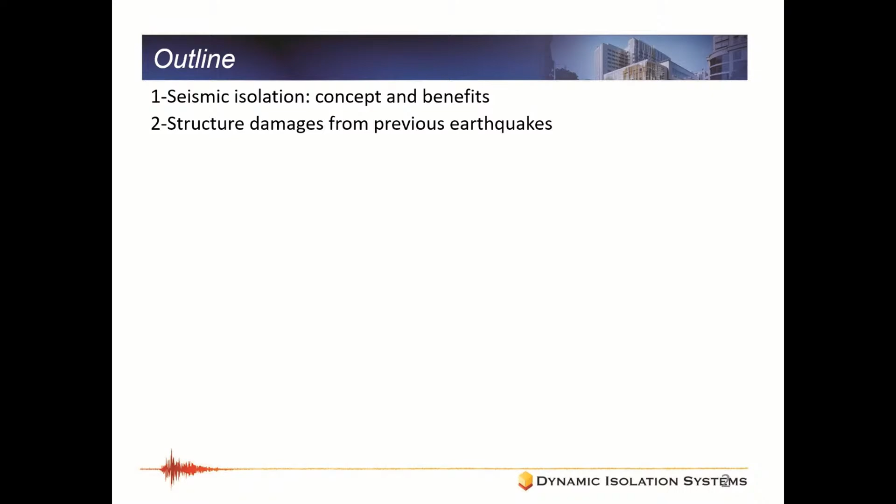I will begin with the outline of the presentation. I will start with seismic isolation in general: what's the concept and what are the benefits of using seismic isolation? Then I will show some structural damages from previous earthquakes. When you design a building or a bridge conventionally without using a protective system, what's the damage that you will be expecting? I will show some pictures and photos from actual earthquakes.

The third point will be the main topic of my presentation. I will be talking about the main product used for seismic isolation, named lead rubber bearings, or LRBs. I'll be talking about the components of the lead rubber bearings, testing, and the benefits and advantages of the bearings. I will also show a case study for cost saving—how you can save money when using lead rubber bearings when designing a bridge.

Then I will show different projects and different applications from different countries around the world, from Chile, Peru, the US, Japan—different buildings, bridges, all kinds of applications. I'll also show that it's good for either new constructions or retrofits. After this, I will show some actual examples of isolated structures around the world that passed through major earthquakes and had no damage. Then I will end this point showing some research projects—we also work with universities and have lots of research projects with them using lead rubber bearings as well.

After I finish this part, I will show another product, also for seismic isolation, but a little bit different. We call it low mass isolation or equipment isolation. In summary, sometimes we want to protect very expensive equipment, such as an expensive computer or a piece of art. Sometimes the building itself is not isolated, but we need to isolate something small, so we have invented a product that can protect equipment.

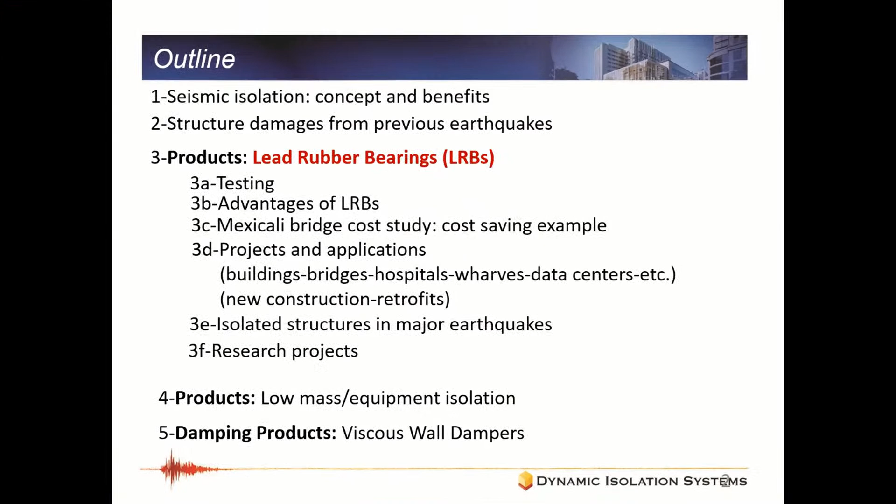So I'll begin with the first topic, which is the concept and benefits of seismic isolation. I will begin with a short video to show the difference between two buildings: one of them is fixed, and the other uses seismic base isolation at the base. This is a shake table testing, showing the differences between the two buildings.

As you can see, when I shake the two buildings, the first one, which is fixed, you can see all the forces and deformations from the earthquake are transferred to the building itself. You can see that it's moving very strongly. But when you look at this building, which is seismically isolated, you can see that all the deformation goes to the bearings themselves, and the building feels almost no forces or deformations.

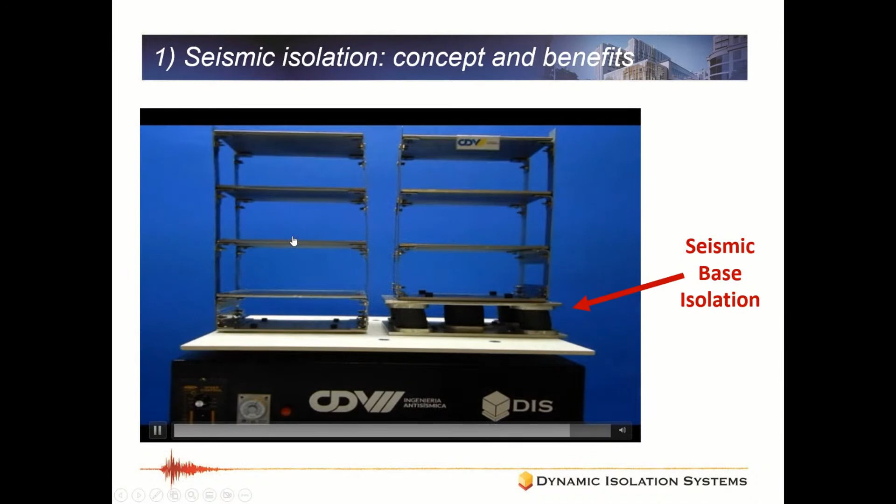So this is the main concept of seismic isolation: to decouple the building from the ground, to decouple the building from the earthquake. All the deformation will go to the product that you are using, and the building will not feel anything. If it's fixed to the ground, all the forces and all the deformations will go up to the building and will cause damage. To translate this into some technical knowledge, this is the typical response spectrum that we get from an earthquake.

Acceleration versus period in seconds. Let's assume that this is the period of a non-isolated structure, around 1 second. What does this mean? It means that a non-isolated structure will move in an earthquake one full cycle in 1 second, so it's moving very quickly. So the period of the non-isolated structure is 1 second, moving very quickly, one full cycle in 1 second.

So what's the main idea of isolation? It is to lengthen this period, to make the building move slowly. Usually for isolated structures, the period will be around, say, 3 seconds, just as an example. So the building now is moving slowly, which causes a reduction in forces in the building itself. This is the main concept: to decouple the structure from the ground and introduce a plane of lateral flexibility, something very flexible. You put it under the building and it will lengthen the period. And as soon as you lengthen the period, the forces are much less — the forces between this point and this point could be 3 to 5 times less.

And not only this — so we do period shifting, but also these products add damping to the building itself. So we decouple the structure from the ground, and we also absorb the energy of the earthquake by adding additional damping.

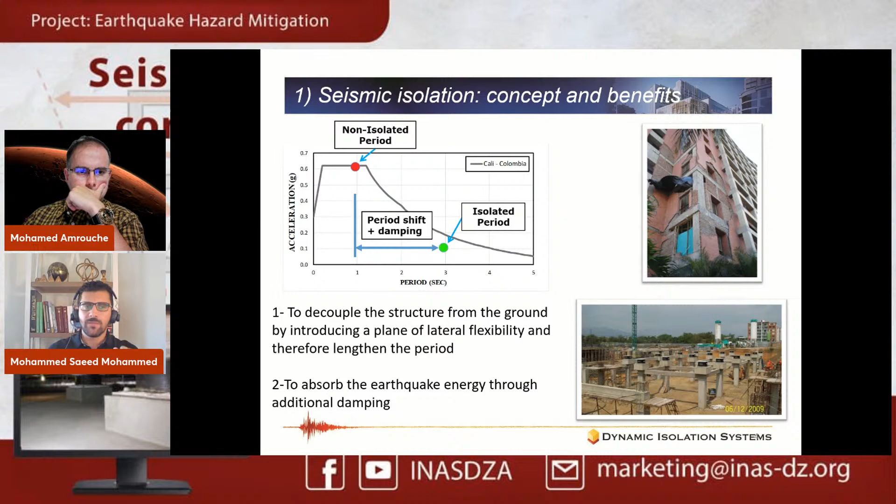So what's this photo on the top right? This is an actual photo of a hospital that was built in Colombia. The owner of this hospital was about to open the hospital and start operations in 2004. And in 2004 in Colombia, it was hit by a very strong earthquake, and as you can see, the building was damaged. The owner spent 3 years to retrofit the building in order to be operational again. Since then, he learned his lesson, and this owner decided to use seismic base isolation in all his future projects.

So as soon as he tried, he learned his lesson the hard way. He was hit by the earthquake. He stopped operations for 3 years. Then he decided to use isolation since then.

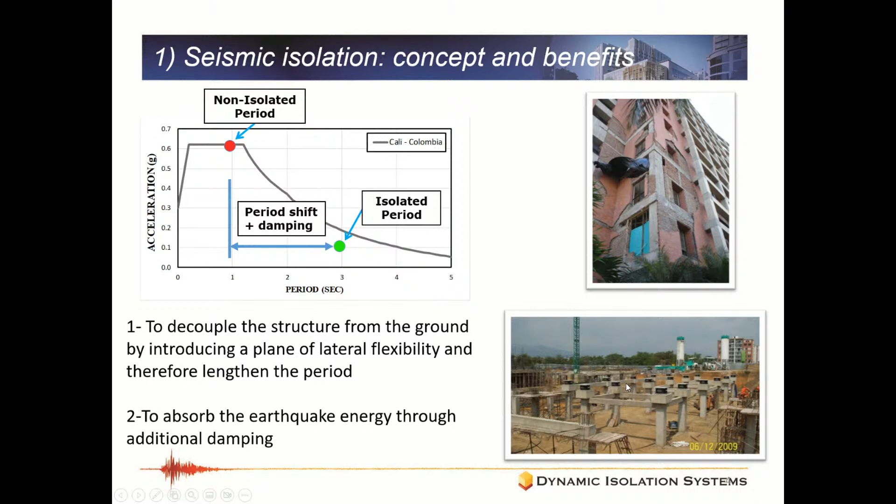Now in the next slide, I'll start showing some damages for buildings and bridges from previous earthquakes. I will begin with a very popular earthquake that happened in New Zealand in 2011, the Christchurch earthquake. I'm showing 2 photos here, of Christchurch downtown before the earthquake and after the earthquake. As you can see, after the earthquake, most of the buildings, like 70% of the buildings in the downtown, were demolished.

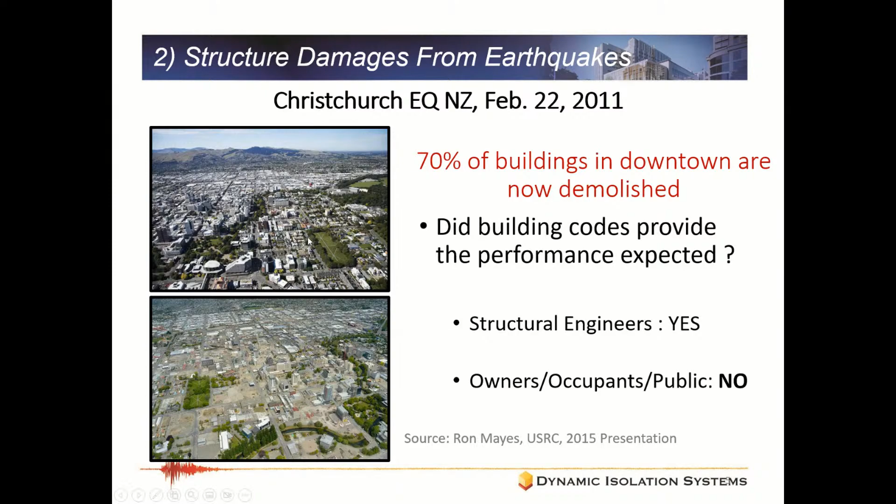Okay, is this good? Is this bad? Let's think. Per the structural engineers, this was okay because there were no collapses or minimum collapses, so they satisfied the codes. All the structural engineers were happy — minimum collapses, life safety was achieved. But the owners and the public did not know this, so they thought their buildings were earthquake proof, and they were not happy. So there was a debate back there in New Zealand: who is paying for the insurance, who is paying for all this demolition, who is paying for retrofits?

So that's why it shows that conventional designs, yes, they are good — life safety is achieved — but they are not good enough, because you will lose functionality, you will lose the continuous functionality of your building. You will need either to demolish the building and build a new one, or repair and retrofit your building, and it might take 1 to 2 years to make it back to work.

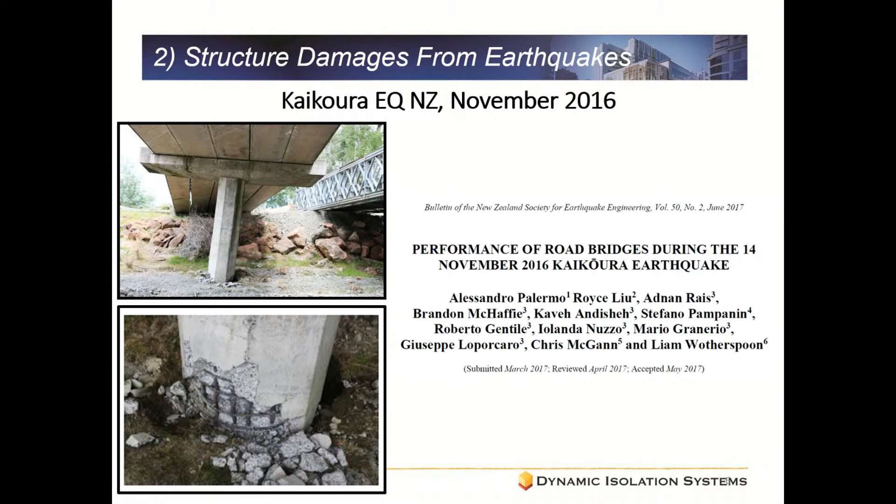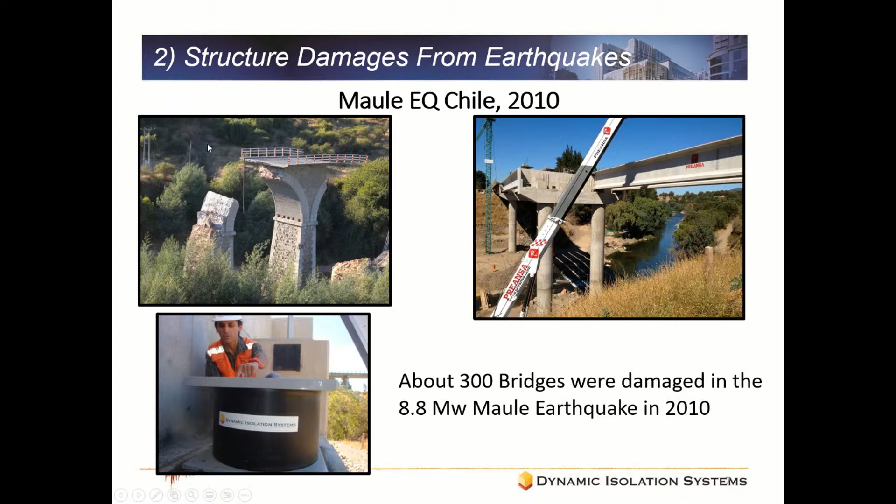Another very strong example from 2010, an earthquake in Chile. It was a magnitude 8.8 earthquake, and this earthquake caused lots of damages and collapses actually in Chile. More than 300 bridges were damaged during this earthquake.

Since 2010, seismic isolation was introduced into Chile. They started having lots of projects in Chile, lots of bridge projects, lots of hospitals and buildings. So they also learned their lesson the hard way - a big earthquake hit the country, lots of collapses, lots of damages, and then they started to use isolation.

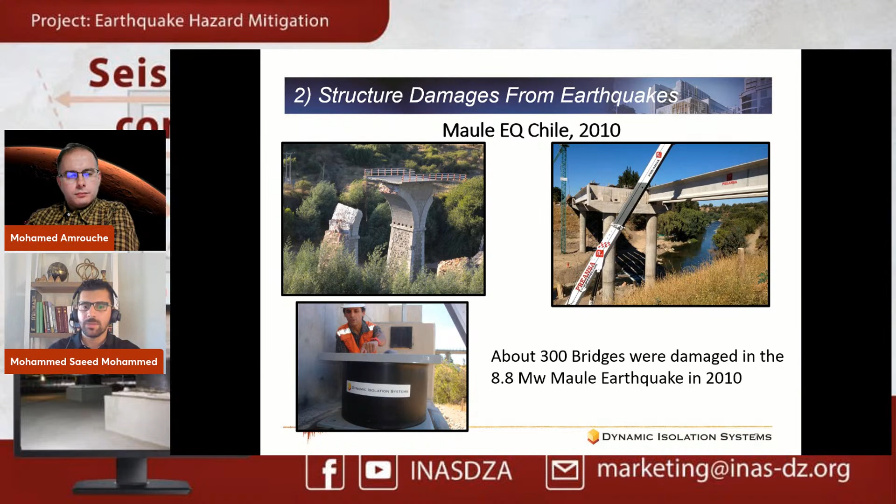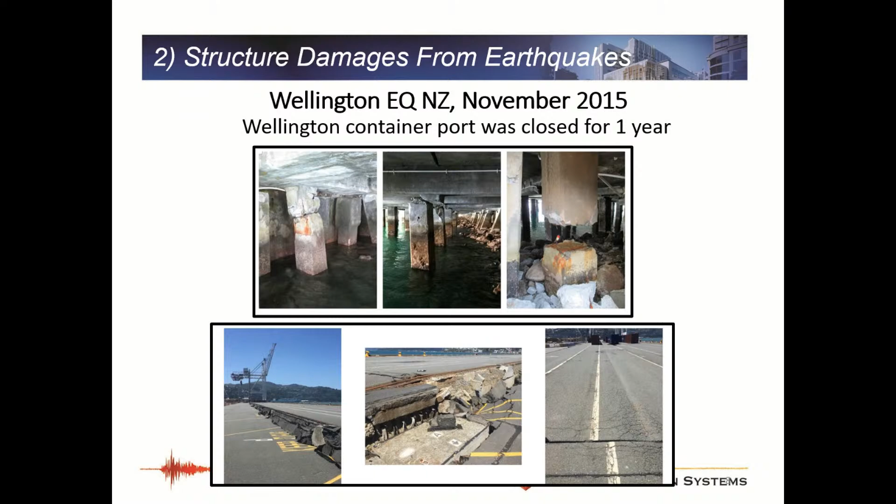All the ships and all the containers that were supposed to go to this port had to change the route and go to another port, affecting the whole economy of the country. So these are just some examples showing you that conventional designs are good, they satisfy the code, life safety is achieved. However, they are not good enough because your building or your structure will not be functional after the earthquake.

Now I will go to the third topic, which is the product itself. What do we use to protect this building? What's the seismic isolation product? The product that I will be presenting today is called lead rubber bearings, and this is the most common seismic isolation product used worldwide.

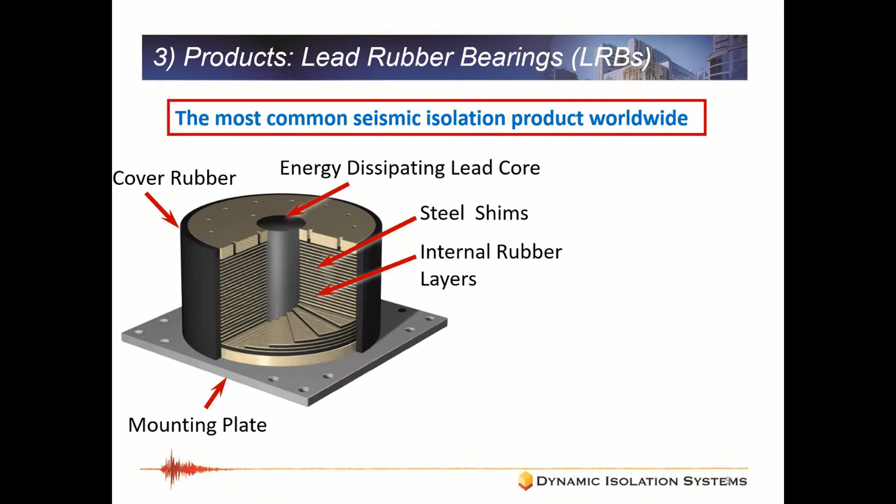If you look at the components of this bearing, you will notice that vertically there are layers of steel and layers of rubber, so vertically this bearing is very stiff, very strong. It can hold the weight of the building and the bridge. So it's very stiff vertically, but laterally, when the earthquake comes, it's very flexible so that it allows the bearing to move and absorb all the energy of the earthquake.

So vertically, it can carry loads up to 4,000 or 5,000 tons. It's very strong, but laterally it's very flexible, so that when the earthquake comes, it will decouple the building or the structure from the earthquake.

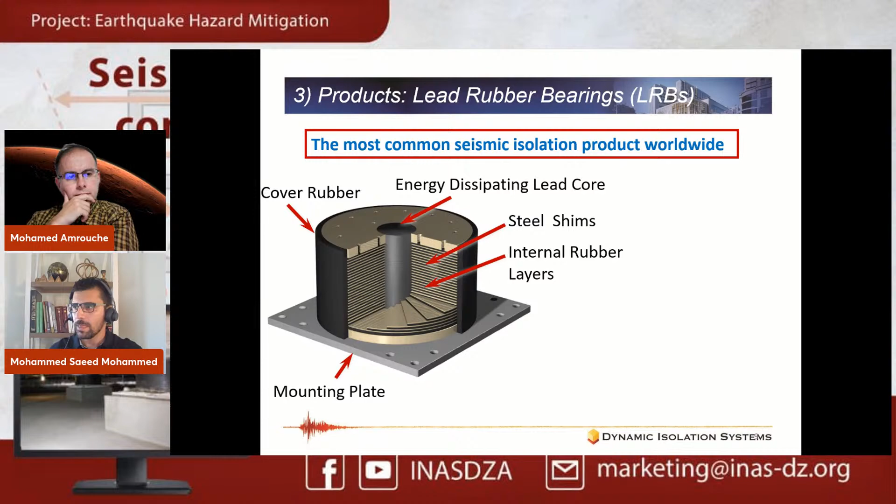In our company, we have built or manufactured lots of bearings, more than 27,000 bearings around the world. Very small bearings and very big bearings. The diameters range from 150 millimeters to more than 1.5 meters. The lead core diameters also go up to 400 millimeters for these internal lead cores. And the vertical capacity is very high, it could reach up to 4,400 tons.

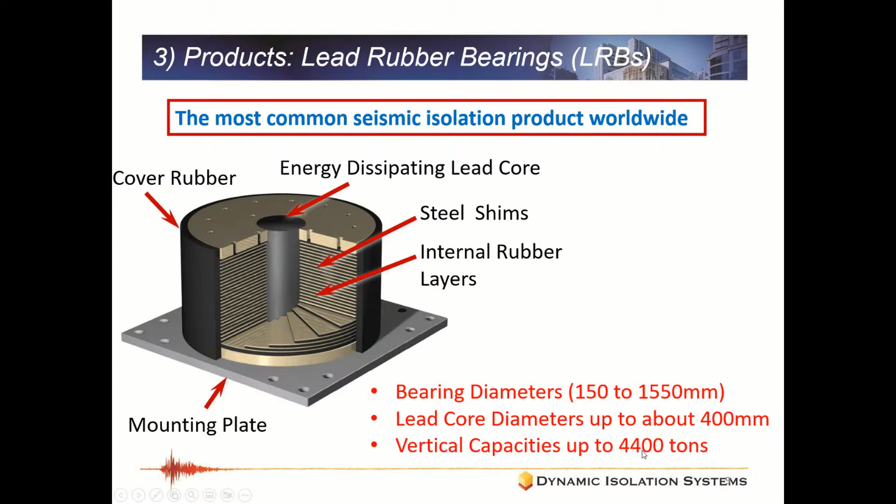One of the projects that we have finished in Turkey. The bearing is connected with anchors up and also anchors down to the concrete.

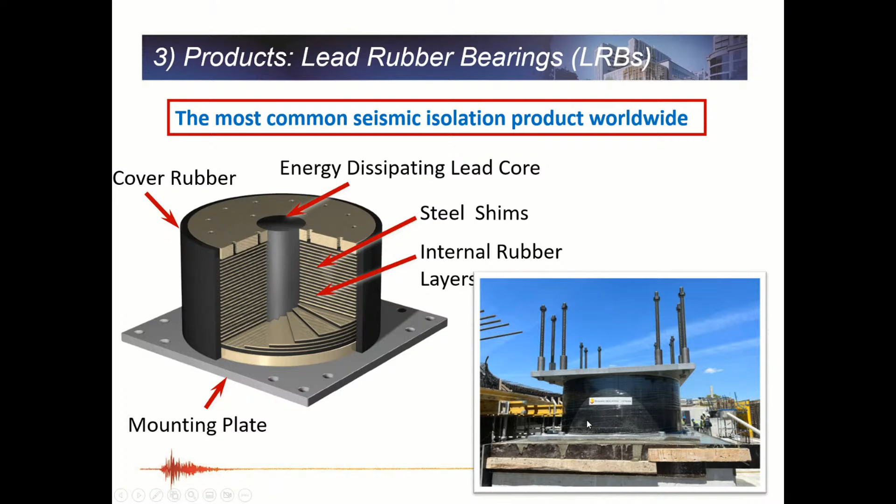So these bearings, when we design them, what about testing? How can we make sure that these bearings are good? Most of the codes around the world require testing these bearings, all of them, 100%. So if a project has 100 bearings, we test 100% of these bearings. Some of the European codes do not ask for testing, or ask for testing only 20% or 30%, and this is also acceptable in some of the codes. But usually, as part of our quality control, I always prefer to test 100% of the bearings to make sure that every single bearing is good, because this bearing is affecting the lives of people, affecting the structures. So we test 100% of these bearings.

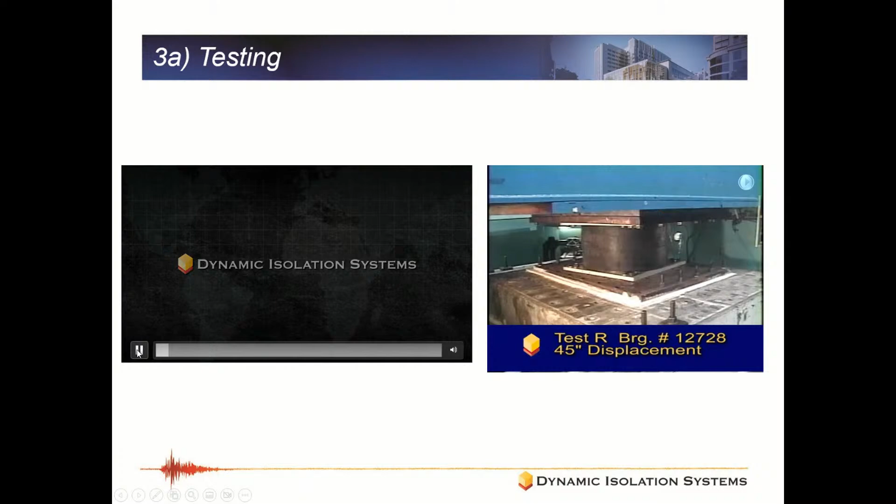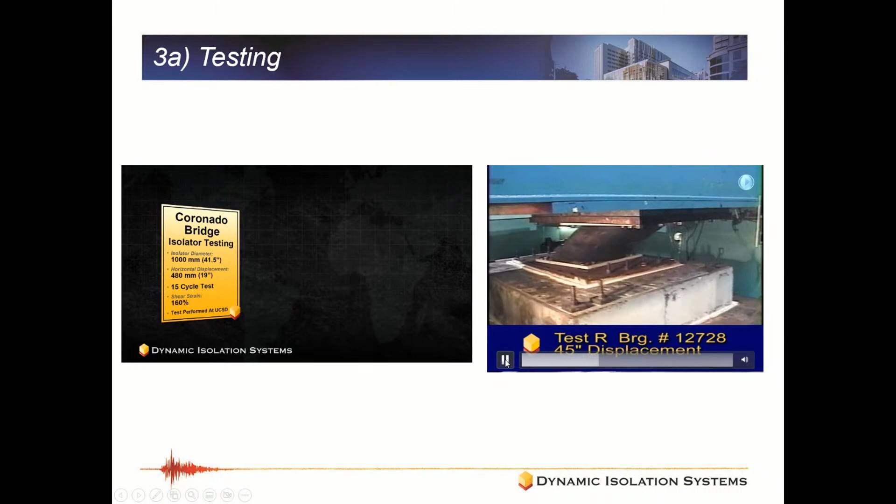Another example for another testing. This was a project in California, in the US, where the peer reviewer asked to push the bearings even more during testing to make sure that they are good. So the diameter of the bearing was 45 inches, and it was pushed to 45 inches of displacement. It was stretched very strong. And as you can see, it's very robust, it will just come back to its original position.

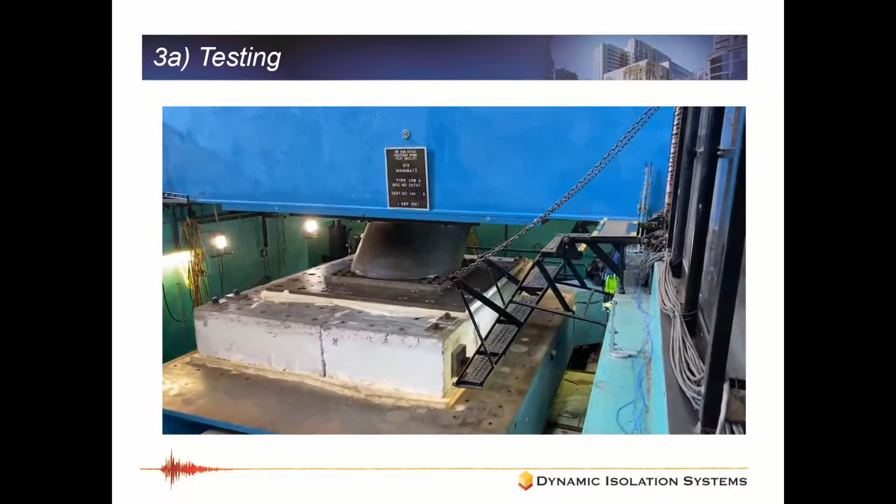Another very recent test that we finished this year for a big project in New Zealand. The bearing will be stretched about 800 millimeters. It's a huge bearing for a big bridge in New Zealand. As you can see, it's stretched very, very strongly. So when the earthquake comes, the bearings will move, the building or the bridge will not feel anything, and then the whole thing will recenter and come back to its original position. These bearings do not need to be replaced. They will just come back to their original position and will be ready for the next earthquake or for the aftershocks. You don't need to replace them after the earthquake.

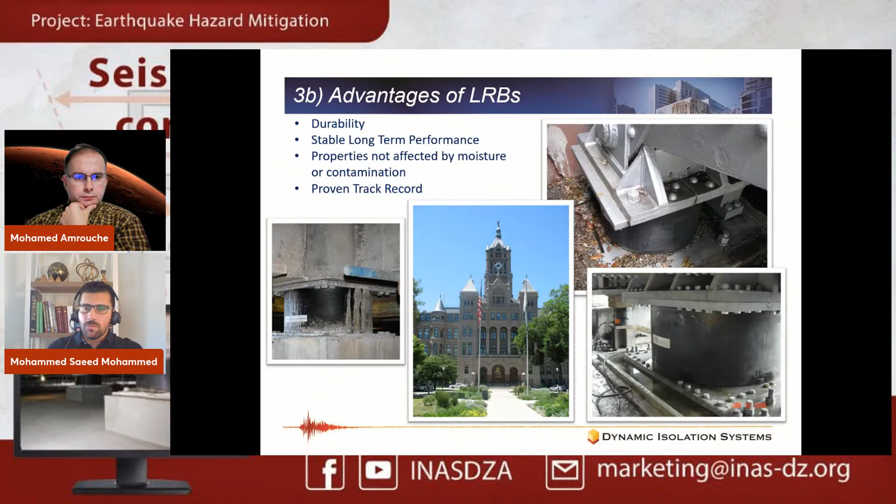So what are the advantages of using LRBs, or lead rubber bearings? There are lots of advantages. One of the main ones is the durability. You want to put these bearings under a building or a bridge and keep them there for the rest of the life of the structure, for 50 years or 70 years. So the durability of these bearings is very strong.

As you can see in these photos, some of these bearings, you can see the concrete is spilled on the bearings. You can see under a bridge there is moisture, contamination, dust. These bearings are very good and are not affected by the moisture or contamination at all. So there is a stable long-term performance. They will stay for the rest of the life of the bridge or the building, and the properties will not change. They might change very minimally, but the properties are stable for the rest of the life of the building itself.

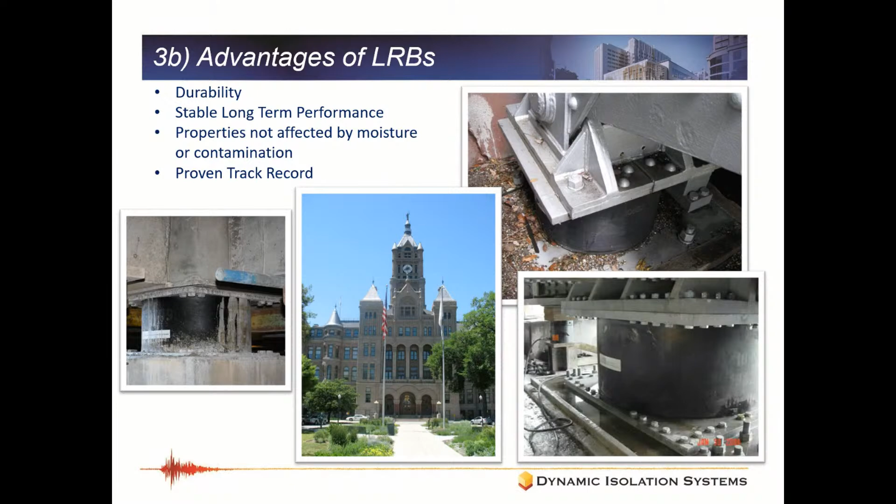Some other photos showing the durability of these bearings. This is a photo from a wharf in Tacoma that we completed about 2 or 3 years ago. As you can see, these bearings are very close to the water. They're not just close, they are actually submerged in water twice a day. So the water will go up and down, and nothing is wrong with the bearings. The properties remain the same, and the life of the bearings is the same as the structure itself.

This is also another bridge in Azerbaijan. The bearings are very close to the water, so they are in the splash zone. Because of the cover rubber that I mentioned before, all the internal components of the bearings are protected.

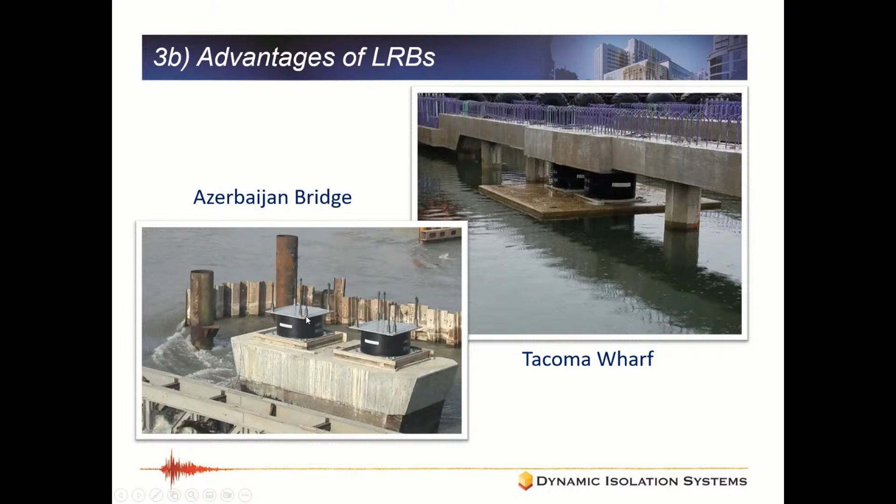Another advantage of this bearing is the cost saving, specifically when you use it for bridges. I'm showing now an actual case study for a bridge constructed in Mexico, the Mexicali bridge. This study was done by an engineering firm named Cautin for this bridge.

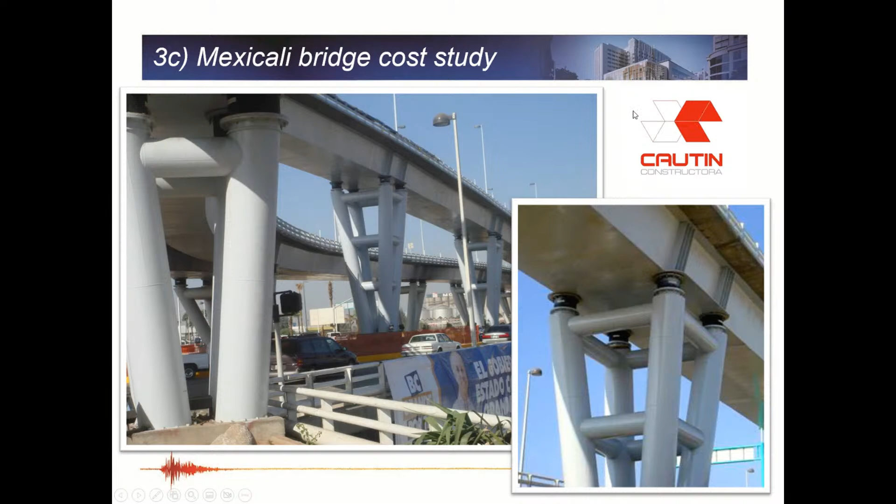What did they do? They actually designed the bridge twice: an isolated design, and then a conventional design. Then they compared the sizes and volumes of the materials that would be used. As you can see, for the conventional design, let's take an example.

For the columns, the concrete volume ratio is 1.56 compared to the isolation case, and 2.85 for the steel volume ratio. So the volume of material for the conventional design was much higher, because the lateral forces coming from the earthquake in the conventional design are much higher than in the isolated case.

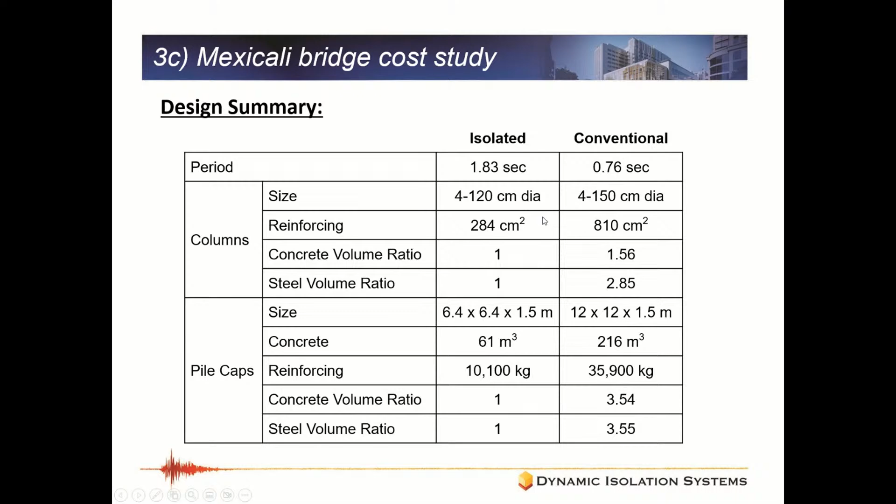And if we translate all these numbers into money, they found that even though the price of the isolators was about $1 million, the total difference in project cost between the conventional design and isolated design was about $2.8 million. So there were a lot of cost savings when they used LRBs in the bridge. This is one of the most important advantages of using LRBs specifically with bridges.

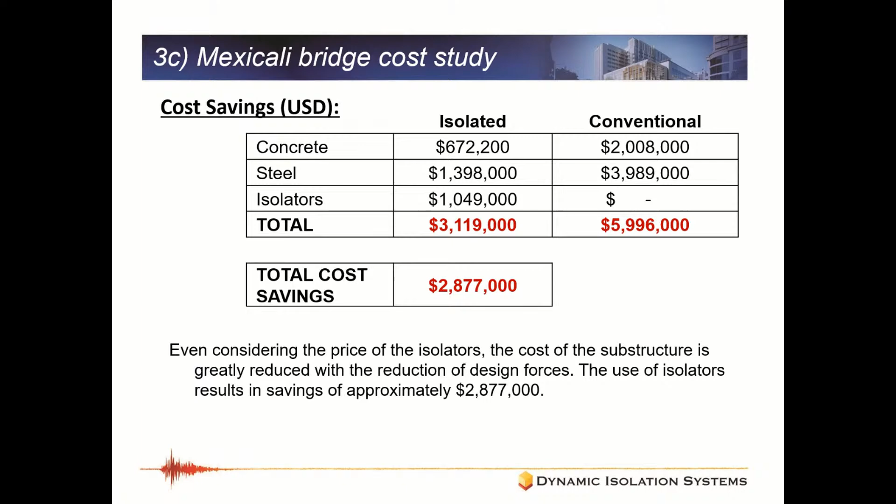After speaking a bit about the product itself and showing you the testing, now I will show you different projects and applications around the world. We have done lots of projects in more than 22 or 25 countries around the world. In all the countries that have earthquakes, you will see lead rubber bearings or seismic isolation.

So when a regular guy wants to buy an apartment, he will ask the owner, is your building isolated or not? And if the building is not isolated, he might say, no, I want an isolated building, I want to protect my savings. So the public awareness there is very high. That's why you'll find lots of residential buildings in Japan are isolated. This is not the case for many other countries.

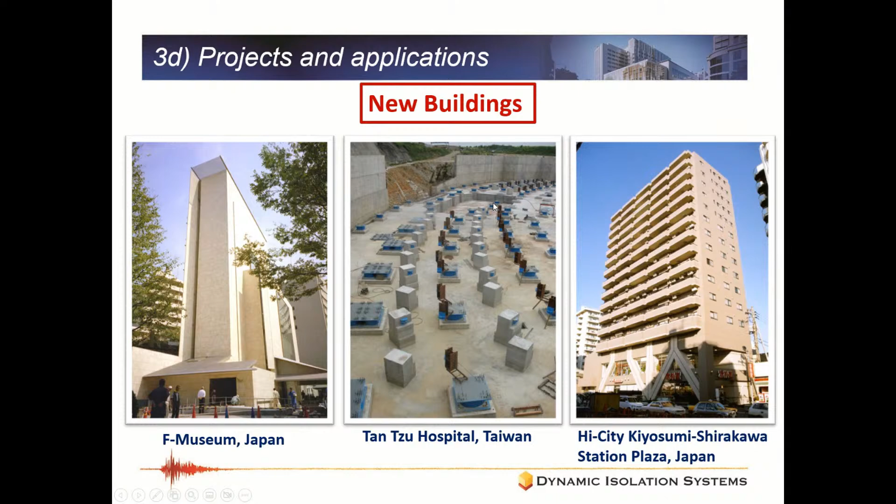More case studies and more examples, but now I will move from new buildings to bridges. Bridges are also a very good example for seismic isolation.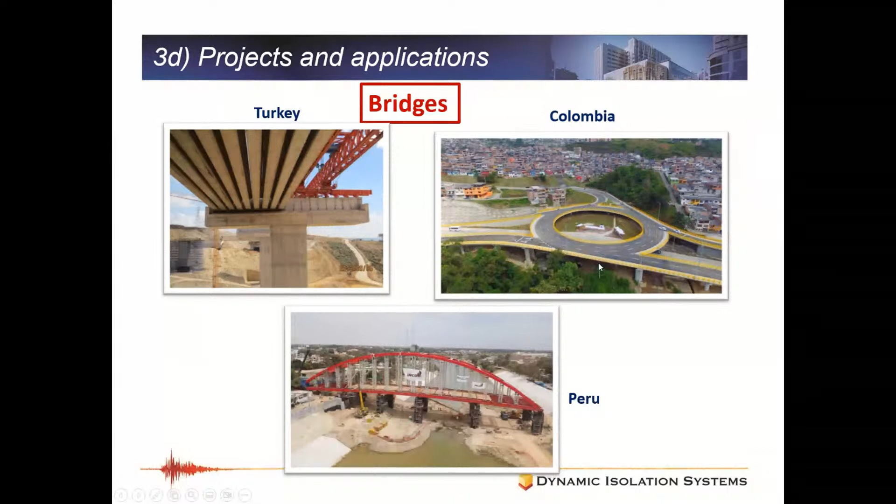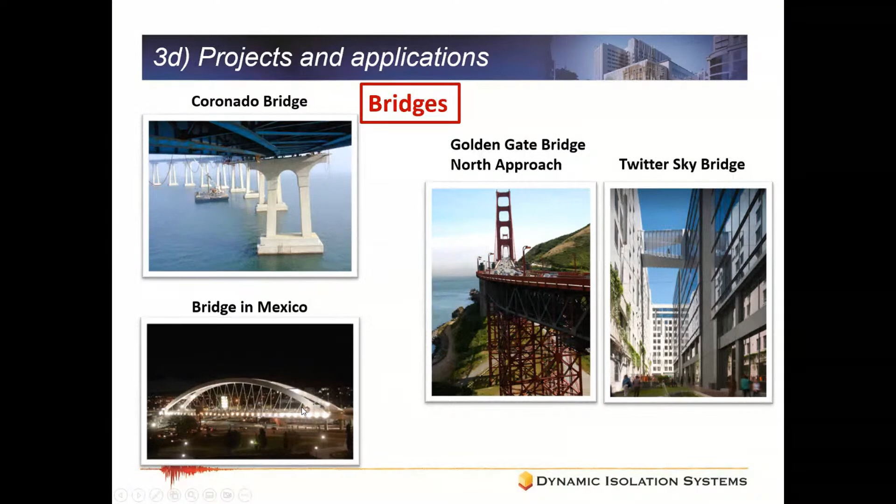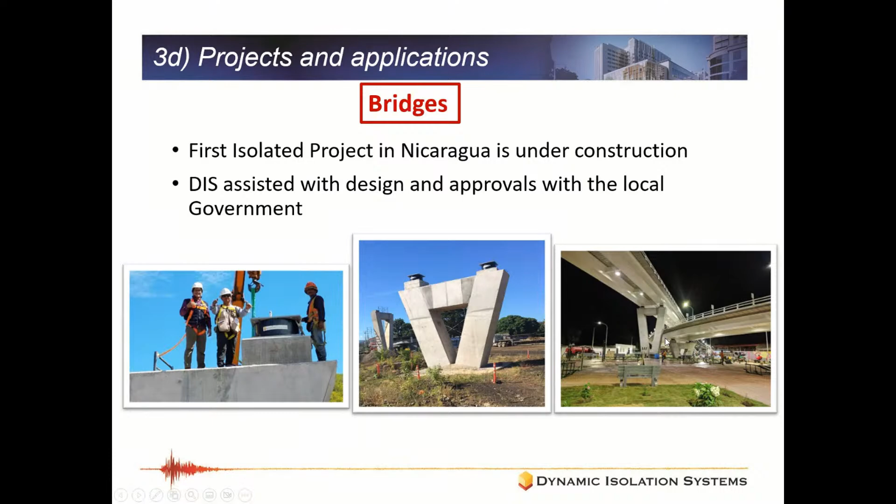Talking about countries that did not use isolation before - this project is in Nicaragua. It was the first isolated project in Nicaragua. It was under construction last year, but they opened this bridge very recently. As a company, we helped the engineers, the company, and the government do all the designs and approvals. We went to the country and saw the installation. We made sure everything was good, and the government and all the engineers there were very happy to have the first isolated bridge in the country.

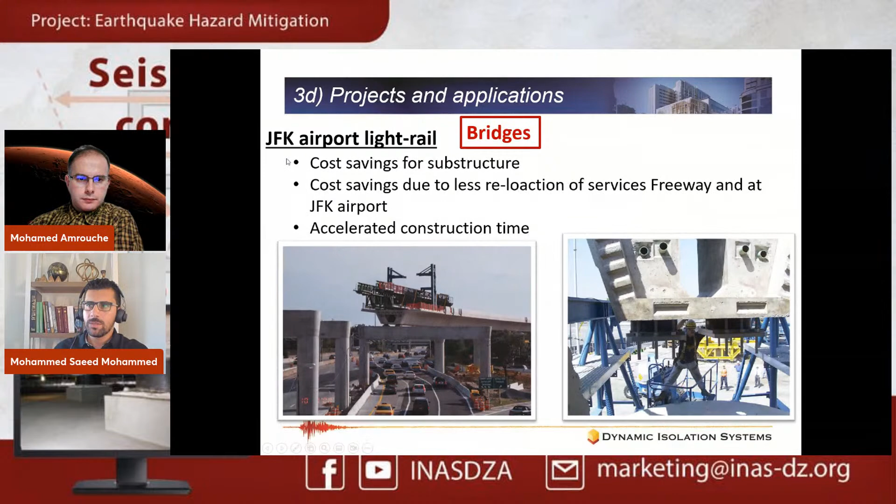Another application, also bridges, but not roadway bridges - we can also isolate railway bridges. It's not easy, it's a little difficult, but it's also doable. This is the JFK Airport light rail. It was also isolated with lead rubber bearings. It's a big viaduct around the airport that makes movement around the airport easier.

When they used isolation, they achieved a lot of cost savings for the substructure, and they also saved costs due to less relocation of services. The services under the ground needed fewer foundations, so relocation was much easier, resulting in lots of cost savings and accelerated construction time.

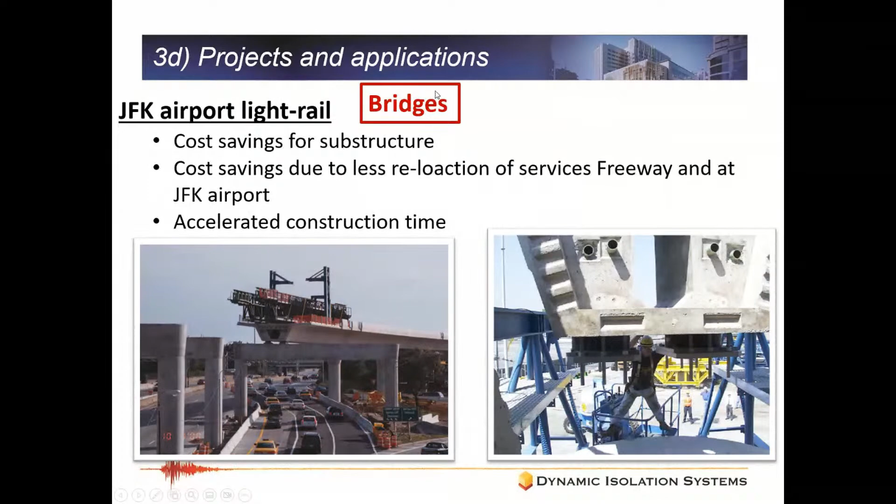These are just examples showing applications in buildings and bridges. Let's go now to another application, which is retrofit. You have an existing building that is old, and you need to retrofit it.

This is a very popular application for buildings with very nice architecture. These old buildings were built, say, 100 or 150 years ago, but now with current seismic codes, they are not good, so they have to be strengthened. But at the same time, they don't want to change the architecture - they don't want big braces in the facade or lots of structural steel members that would ruin the building's architecture. So the best solution here is to use seismic isolation.

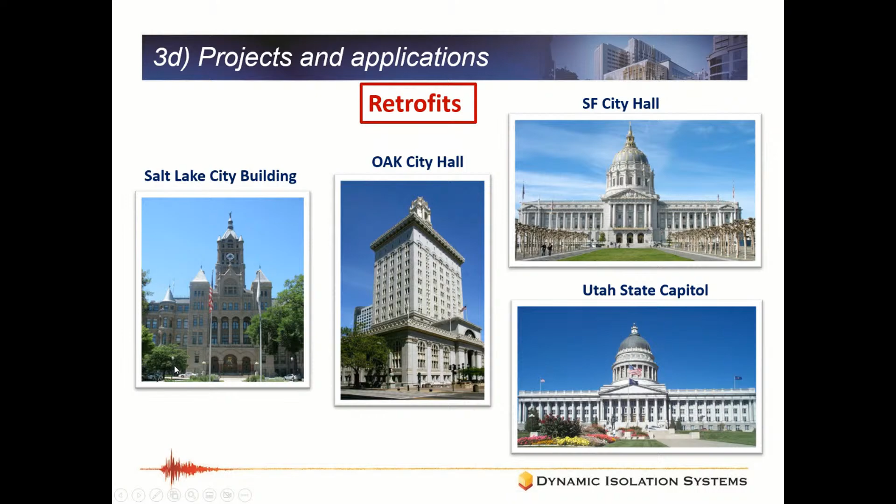You go there, cut the columns from the bottom, push the building up, put in the isolators, and set the building back down. You keep the same architecture because you've significantly reduced the forces going up into the building, and it looks exactly the same as before. This is not cheap - it's expensive - but clients with buildings like this who want to preserve the architecture are willing to pay more money to keep the buildings looking nice.

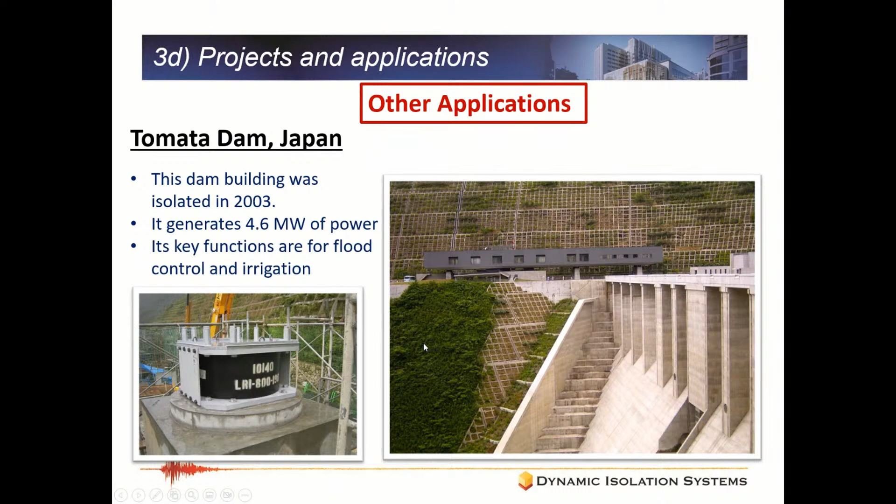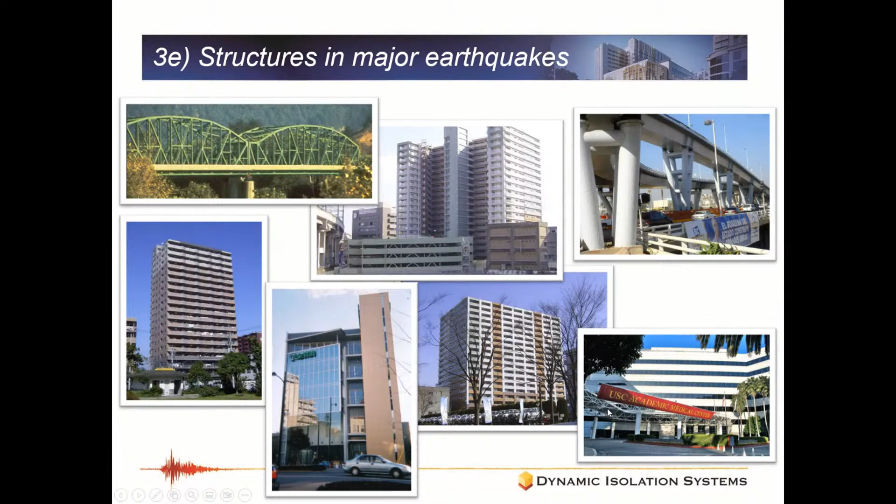This is a bridge in California that passed through an earthquake in 1989. This is the Mexicali Bridge in Mexico, which passed through the 2010 Mexicali earthquake and was functional right away afterward. This is a hospital, the USC Hospital in Southern California, which was isolated and passed through the 1994 Northridge earthquake - I'll talk more about it in the next slide. All these other buildings are in Japan, and they passed through the 2011 Tohoku earthquake - they are all isolated and all functional after the earthquake.

Going to the next slide to talk about the USC Hospital. This case study is very interesting. The hospital was built in the 90s and was isolated with lead rubber bearings. It was instrumented on all the stories with accelerometers that measure the acceleration of the earthquake.

The 1994 Northridge earthquake hit the hospital, and afterward it was absolutely functional, but we wanted to measure the forces along the building itself. On the ground, the earthquake force was about 0.37 G - the PGA was 0.37 G. But along the building itself, all the accelerometers measured around 0.13 G down to 0.11 G. So the forces were reduced significantly from the ground below the isolation level up to the top of the isolation level, and nothing happened to the hospital.

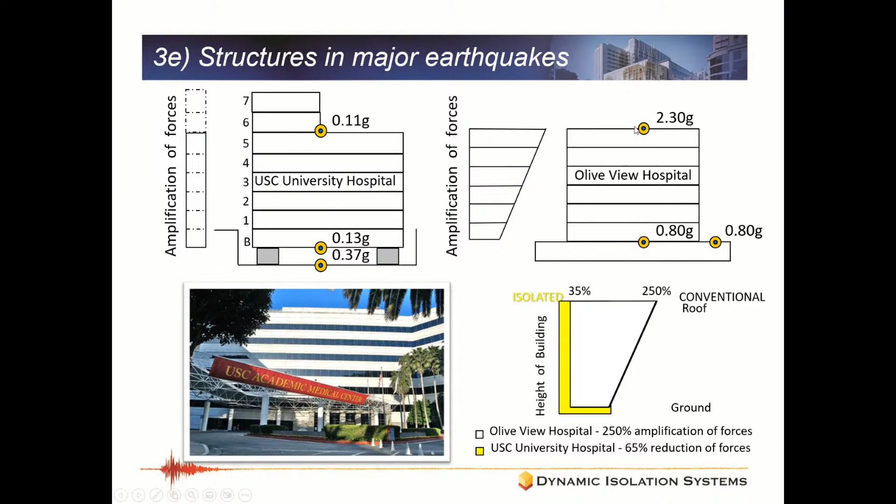So there is amplification if you are fixed to the ground, as I showed in my initial video, and there is reduction in forces if you are using isolation, because all the deformation already went to the isolation themselves.

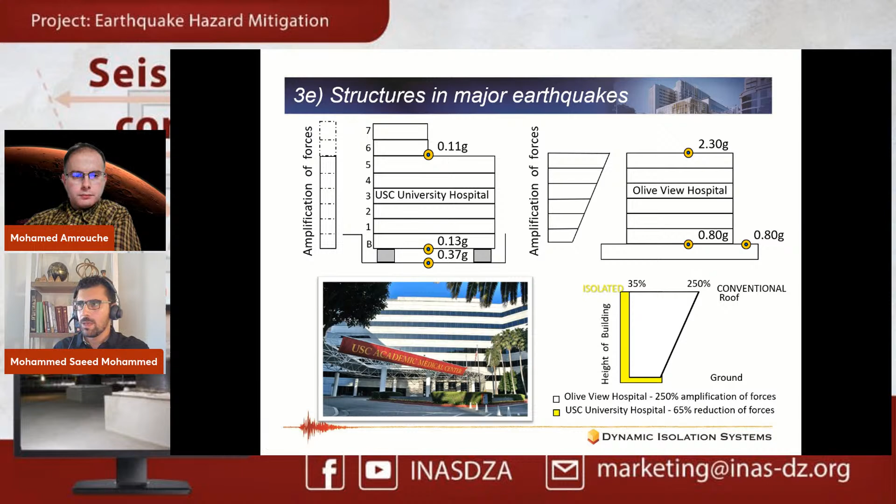Let's go to the next slide, and I'll talk about some research projects we do - not just practical applications, we also work a lot with universities. This is a shake table test for a full curved bridge, done at the University of Nevada, Reno. In this university they have 4 shake tables. On each shake table there was an abutment, then a pier, then another abutment, and a full bridge across the tables, with all 4 tables moving together.

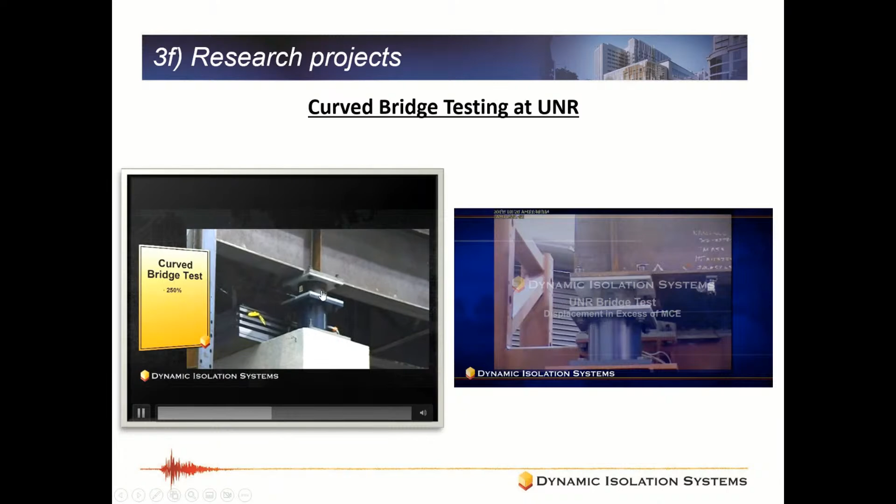Here is the video showing how they are moving - here is the isolation. The whole bridge is shaking and then recenters and goes back. Here is a zoom in: as you can see, the whole thing is moving, and after the earthquake the bearing will recenter and return back to its original position.

Another video from the same project, also part of the research. The professor back then decided to push the bearings and the bridge even more - they pushed the bridge 250% more than the capacity of the bearing itself. This is a zoom in on one of the bearings, which was pushed significantly beyond its capacity.

Here's the bearing. You can see it was stretched significantly and then returned back and recentered. I want you to notice something - see this black spot here? This was not there before the test. The whole bridge sat down on the bearing.

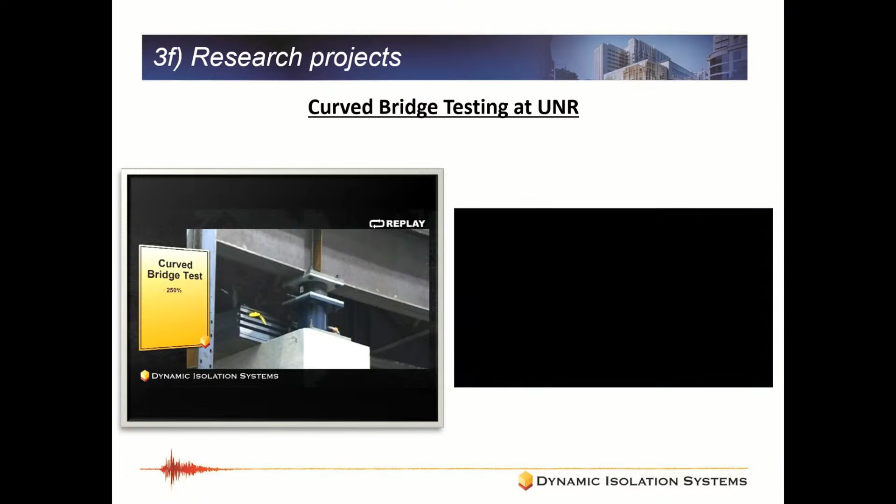Let's look at this again. See, the whole bridge was stretched significantly, and the bearings are robust. The whole system returned back to its original position and recentered. This shows one of the biggest advantages of these lead rubber bearings - they're very robust, they can recenter and come back.

So this is the first product, or the main product, which is the lead rubber bearing. I showed some testing, some applications, examples, actual earthquakes. And now I will move to the next product.

As I mentioned in the very beginning, sometimes we do not need to isolate the whole building or the whole bridge. Sometimes I have something small inside my building that's very expensive, and I need to isolate this specific part of equipment or this specific computer, for example. We call this product low mass isolation - sometimes equipment isolation or non-structural isolation. It's not like structural isolation for a bridge or building. This product was developed by our company, and there is a patent on it.

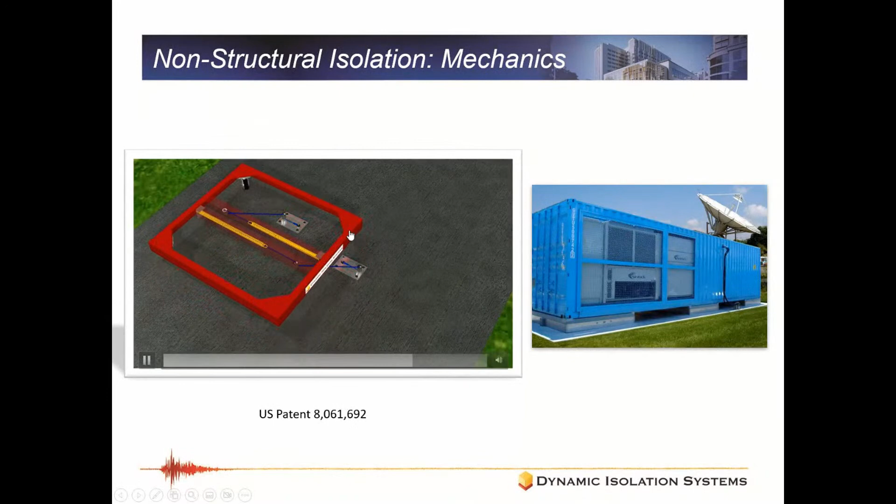This video will show the main components of this product. It's mainly composed of some steel frames, very simple angles, connected to springs, and these springs connected to some cables to the ground, and the whole thing stands on wheels or casters. So it will move during the earthquake and recenter and come back.

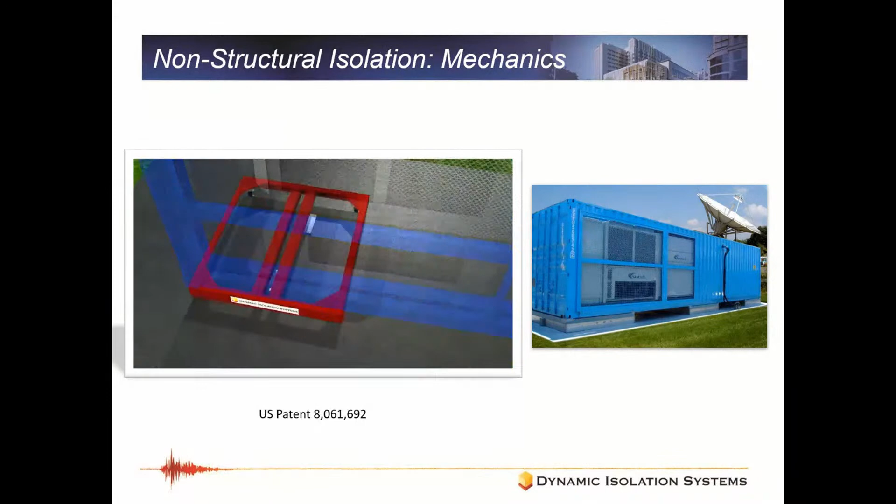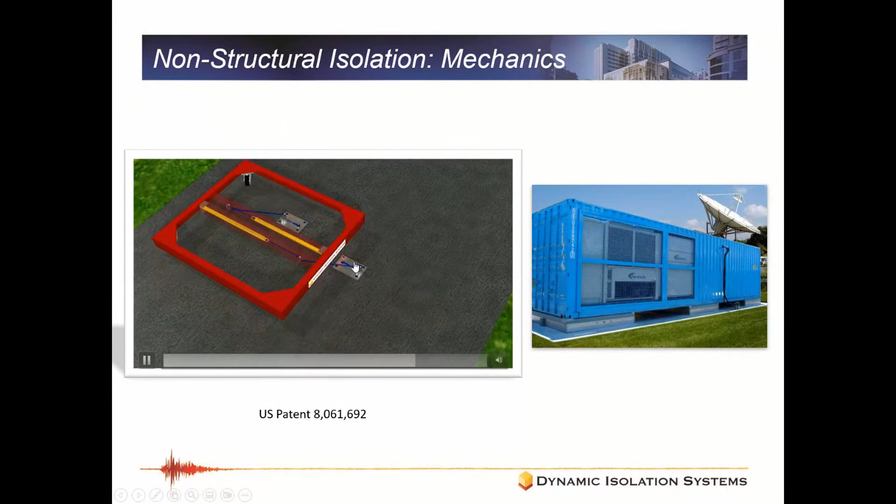Let's look again. A steel frame, simple angles, springs connected to the ground with cables, moves on wheels. The whole thing will move during the earthquake and will recenter because of the spring and come back to its original position. It's very simple, very easy, and you can use it for simple equipment like this.

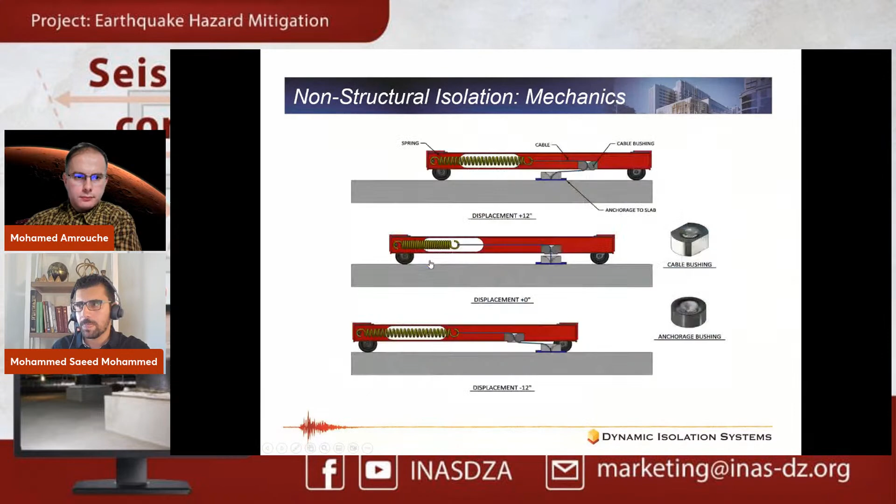This is just some cross sections from the system itself, showing how it looks. In this picture, this is the zero displacement position. Here is the spring connected through bushings to the ground. When you push this way, the spring will be extended - this is what will happen. And when you push the other way, the spring will also be extended. After the earthquake, the whole thing will recenter because of the force of the spring.

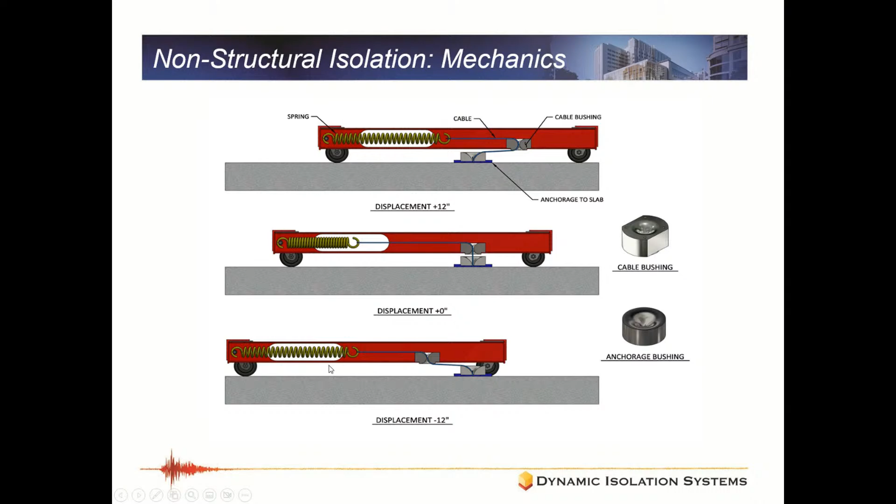Let's look at some videos as well to understand more how this works. In this video, I'm showing two tests on shake tables. This is an isolated server on the platform, and this is a non-isolated server, fixed to the table. You will see when I start shaking both servers what's the effect of the earthquake on these servers. Let's compare.

As you can see on the isolated one, the server is just moving parallel to itself, nothing is happening. If you look at this one, all the cables are unplugged, the whole thing wants to fall down - although this earthquake is actually 50% less than the other one. So in isolation, the whole thing is moving very smooth, no forces are moved to the server itself. But in this one, you can see everything is unplugged, the whole thing wants to fall down. This is the difference between isolated platforms or isolated servers and non-isolated.

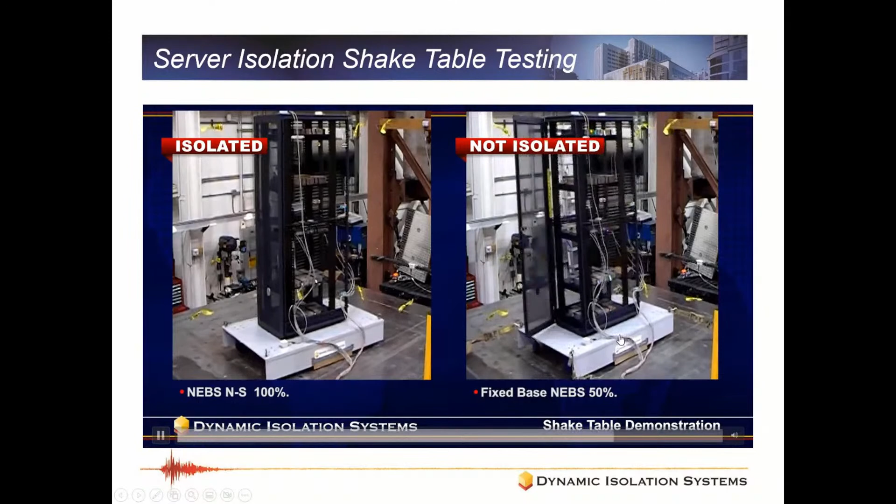Let's look at some applications and examples of actual projects that were finished. These are some photos taken from the Salt Lake City public safety building. They had some servers inside the building that they wanted to protect, so they used the isolation platform that we developed underneath these servers to keep them functional after the earthquake.

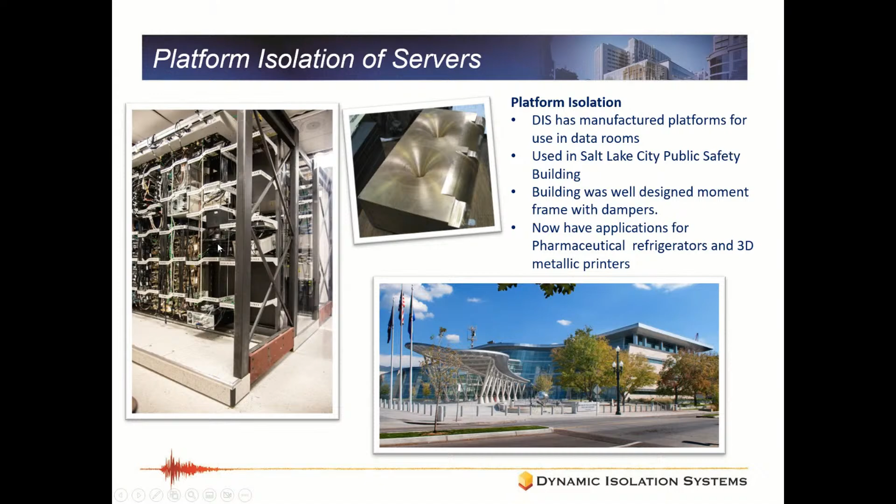Another very interesting example is a platform that we finished with the Department of Defense here in the US. They had some equipment that is very, very critical - these servers control the satellites in space. So in order for them to control these satellites and be functional after the earthquake, they needed an isolation system like the one I showed you in the very beginning.

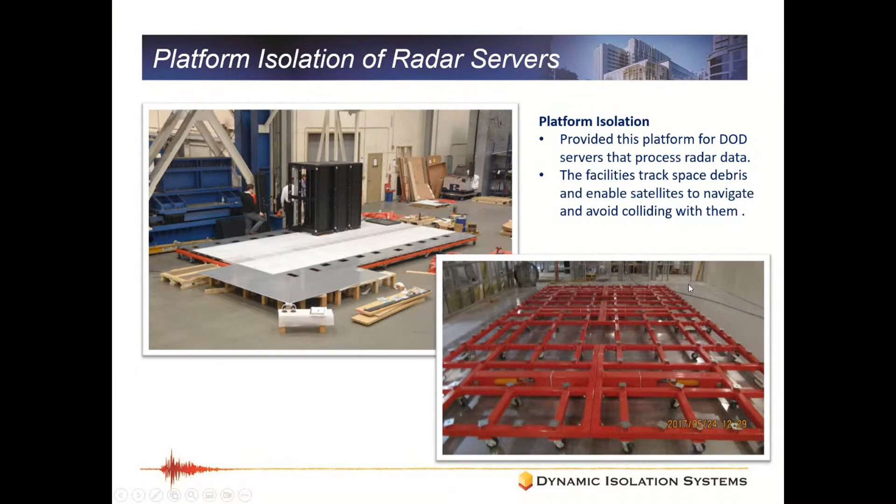As you can see, you can have different configurations of the isolation system itself. It could be just a small part, as I showed in my video, or it could be a full floor or a big platform like this, so that you can put lots of servers on the same platform.

Another very interesting example - this is in Berkeley, Lawrence Berkeley National Lab. They have computers that control the electricity grid in the US. The value of these computers is like $100 million, so they are very expensive. They need to keep them functional after the earthquake - they are controlling the electricity of the US. So they decided to isolate the whole floor of the building. These are all the computers, and this is the isolation system.

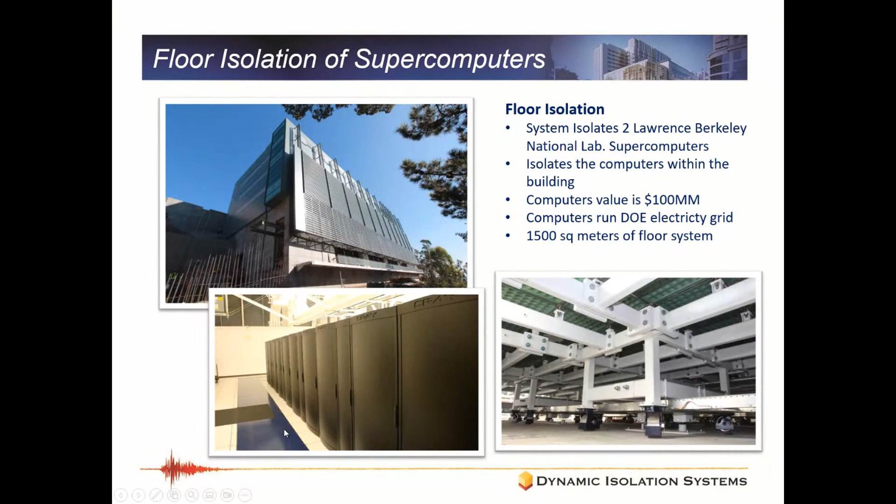The whole floor was isolated, and this blue part we call the moat or the gap, because when you do isolation, you need some space to move, as I showed you in the videos. So when the earthquake comes, this blue part will break and allow the whole floor to move, so that all the computers will be functional after the earthquake. So even if there is damage in the building itself, the computers will continue to be functional.

Another application, and it's also very interesting, especially now in the Middle East because we have lots of very expensive artwork and monuments. This is an artwork in California. The cost or value of this statue is about $700,000 or $800,000, and it's very slim and very tall. So if this statue is fixed to the ground, as soon as the earthquake comes, the whole thing will just fall down and break. So they decided to use a seismic isolation platform, which will just move back and forth, and nothing will happen to the statue itself.

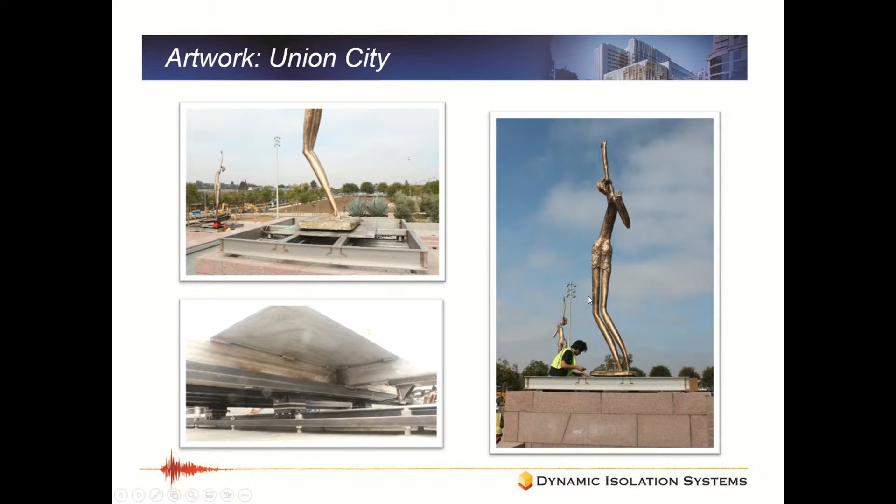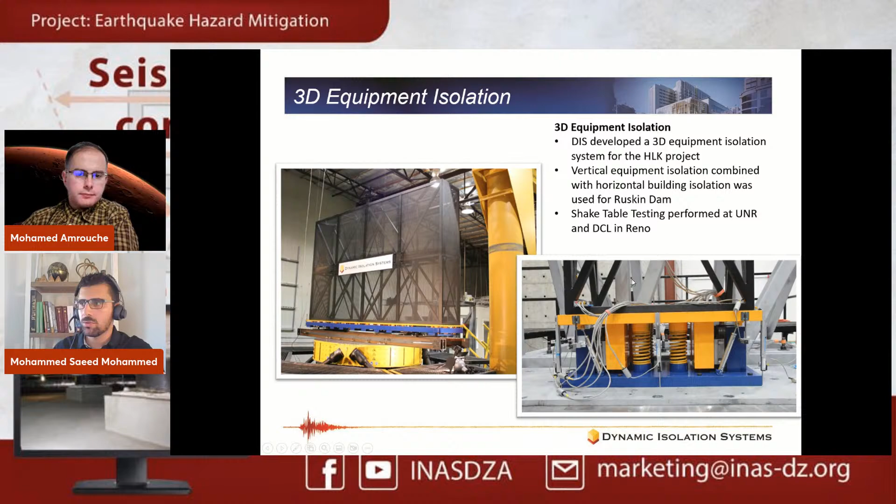Another product that was developed is 3D equipment isolation. In this one, we are not only isolating horizontally, we are also isolating vertically, because sometimes the vertical component of the earthquake is very high. So we added some other vertical components, like dampers and springs, so you can isolate the equipment vertically, not just horizontally. This is a short video showing how it works—see, the whole thing is moving horizontally and also vertically. So the equipment is protected from horizontal earthquakes and also from the vertical component of the earthquake.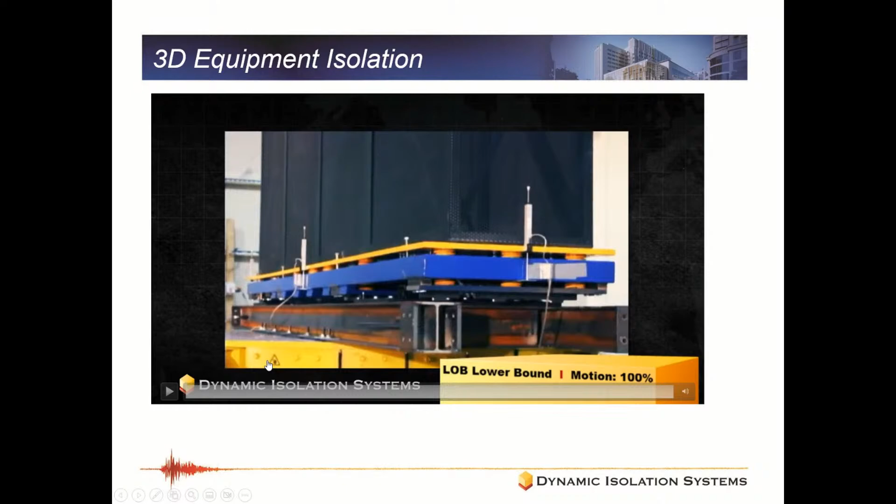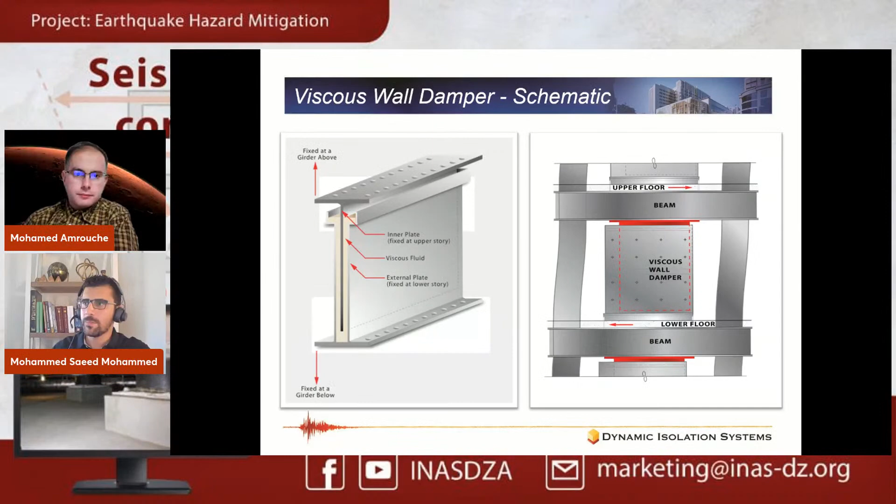This is just a brief about this product and about seismic isolation in general. I will talk a little bit about another product, which is a damping product. It's not seismic isolation—it's a viscous wall damper. What's a viscous wall damper? This is a schematic of the viscous wall damper.

It's composed mainly of a steel tank, and this steel tank is filled with a viscous fluid with very high viscosity. Then there is this vane, with a T-section, that goes through the viscous fluid. When the earthquake comes, the whole thing will move back and forth, and the vane will shear into the viscous fluid and absorb the energy of the earthquake.

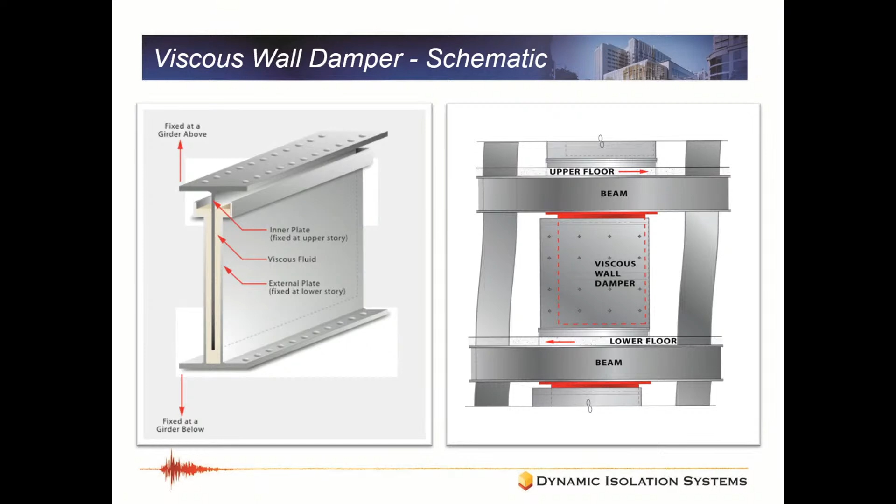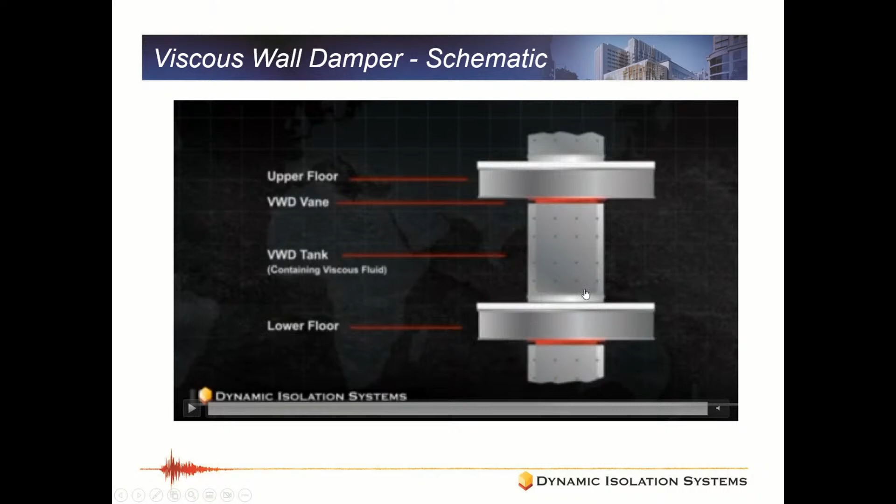To explain this more, I have a short video here. We have a tank that is connected to the lower part or lower beam of the building, and then we have a vane that goes into the tank connected to the top floor. So when the earthquake comes, the vane will shear the fluid and absorb the energy of the earthquake. That's why we call it a viscous wall damper—it's a viscous wall hidden inside the wall of the building.

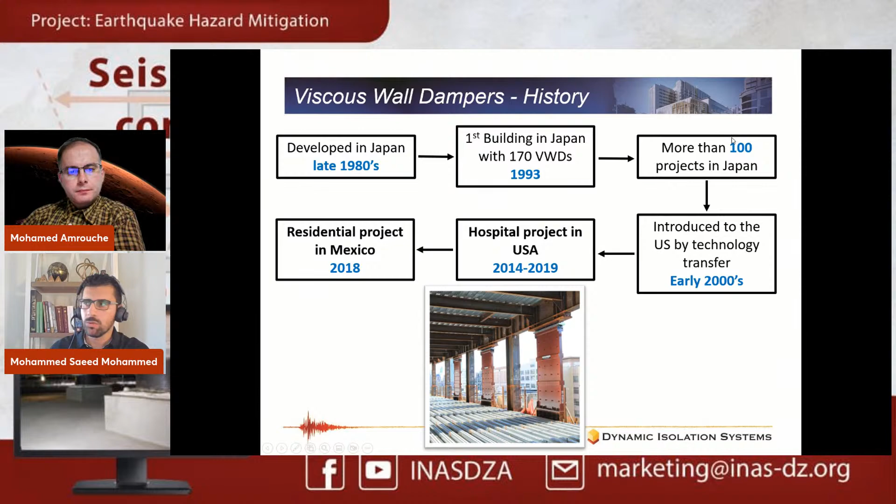What's the history behind the viscous wall dampers? These walls were developed in Japan in the late 80s. The first project in Japan was in 1993. Since then, they've had more than 100 projects in Japan using viscous walls. It was introduced to the US in the early 2000s.

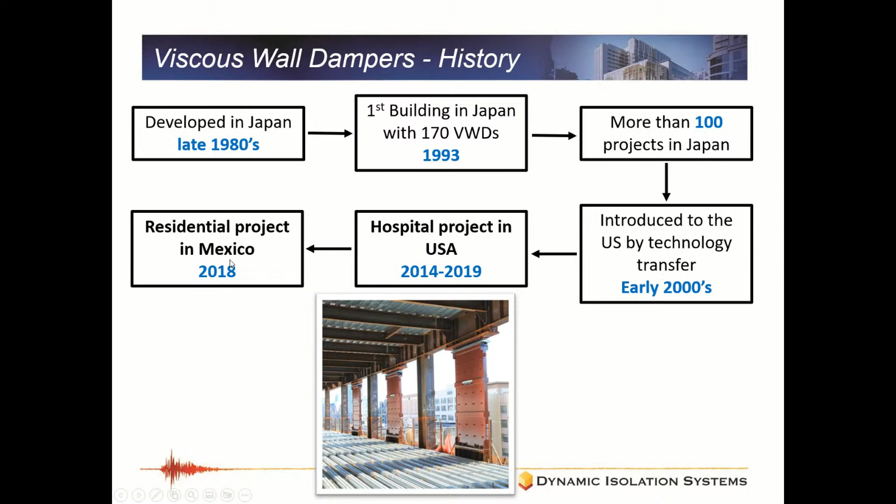Between 2014 and 2019, we worked on a big hospital project in the US, and this was the first viscous wall damper project in the United States. We then worked on another residential project in Mexico in 2018. So in North America, we had only these two projects, and we are working on a third now. I'm showing these two because one was new construction and one was a retrofit, to show that it can be used for both.

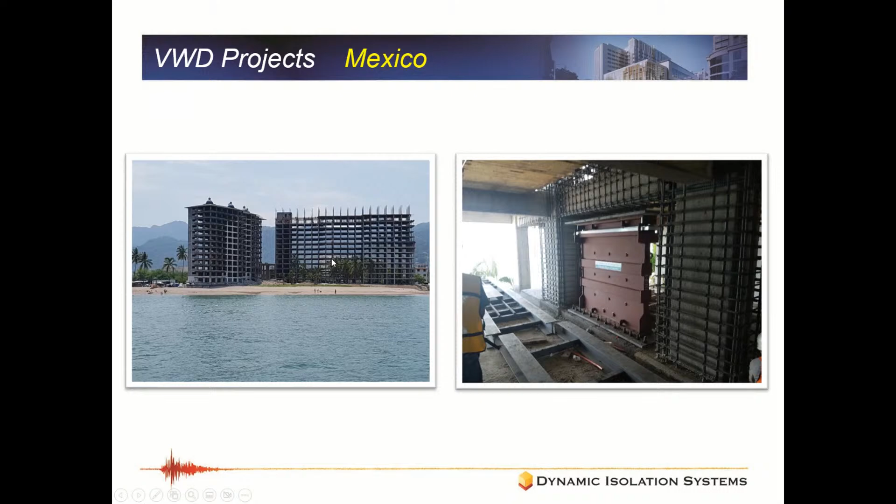Let's look at the Mexico project first. This is a residential building in Mexico. The owner started construction back in 2006, but because of financial issues, they did not finish the building. They came back in 2017 wanting to finish it, but found that the seismic hazard had increased and the building was no longer adequate—it could not sustain the actual hazards now. So they decided to use viscous wall dampers to absorb the energy of the incoming earthquake, with minimum strengthening to the building itself. They used viscous walls along the height of the building.

For the next project, the hospital I mentioned in the US—the name of this hospital is CPMC, in San Francisco. This hospital is very close to the San Andreas Fault, just 11 kilometers away. So they needed a protective system to protect the hospital after an earthquake. As you can see, these are some photos of the walls along the height of the hospital during construction.

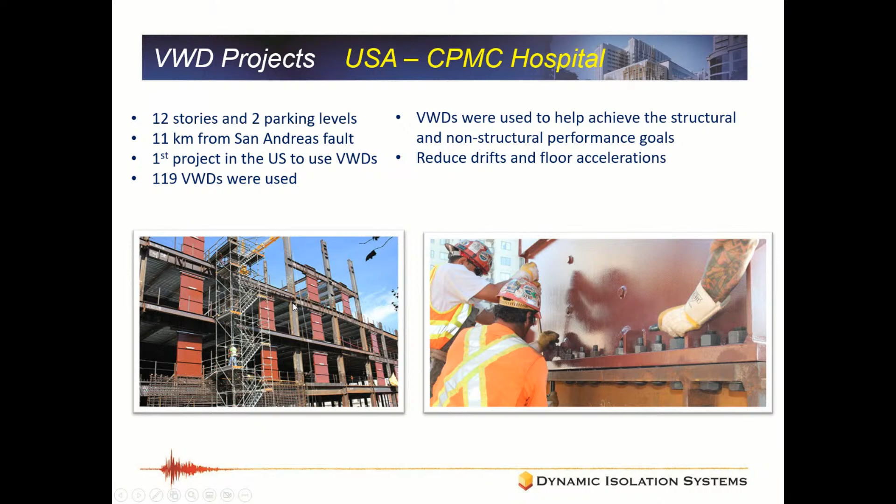These are also some photos from the hospital. You can see along the height of the building. And the good thing, one of the biggest benefits of these walls, is that they are not under pressure. There is no high pressure involved.

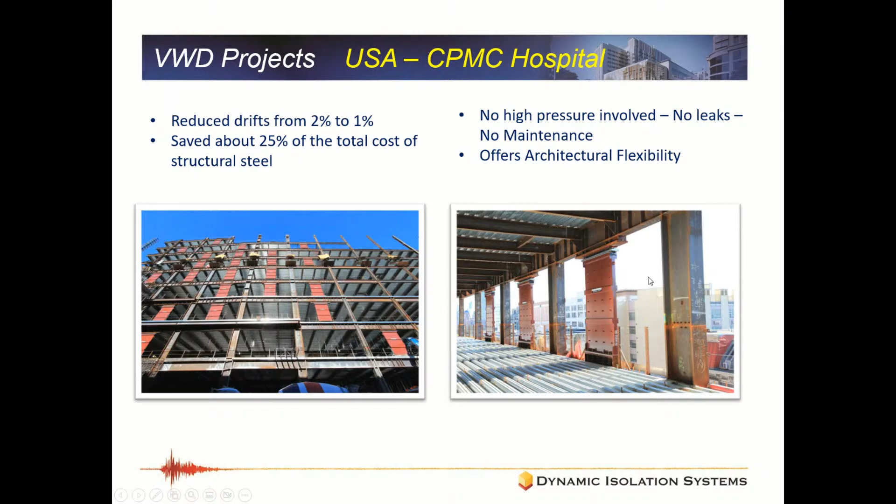So there is no seals, no leaks, and minimum to almost no maintenance. Also, there is a huge benefit, which is the architectural flexibility. The architect of this hospital decided to go with the walls because they will be hidden within the walls of the building itself. They can have windows because these are hospitals, they need windows. If they decided to use bracings, they would have big diagonals crossing the windows and walls. So that's why they decided to go with the walls, because it offers lots of architectural flexibility.

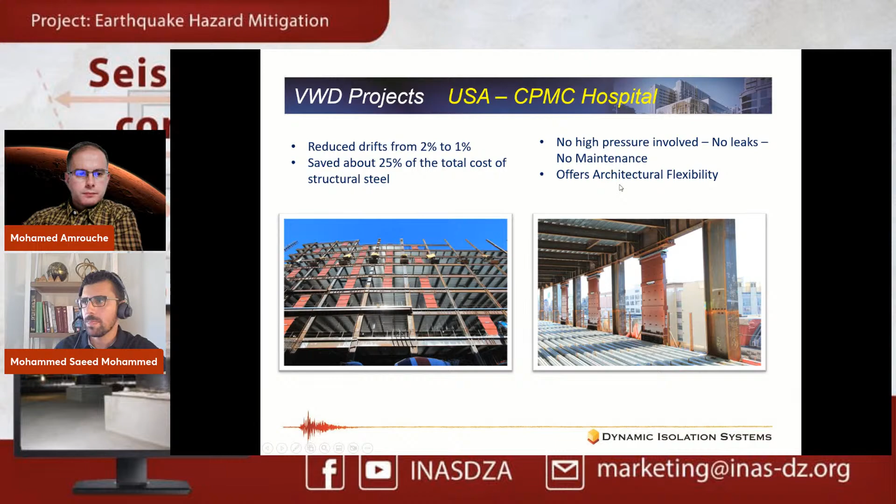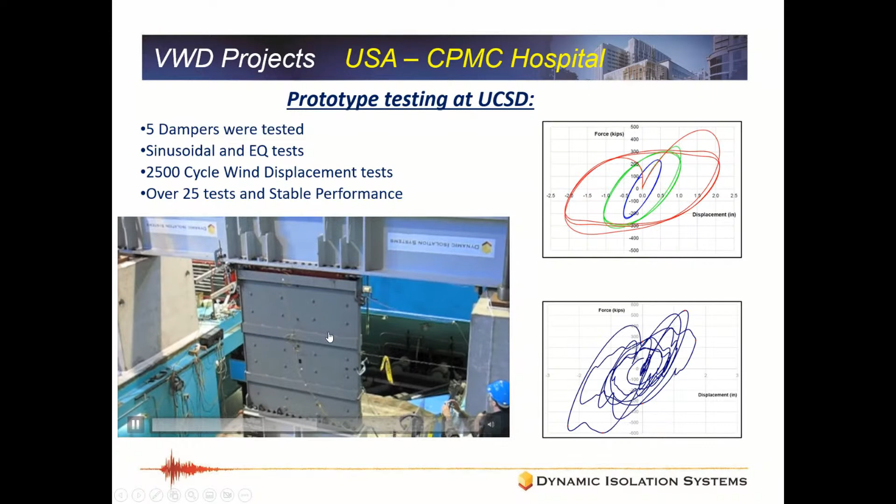In summary, seismic base isolation and energy dissipation devices protect lives, protect structures, protect money and contents, and ensure the continuous functionality of the structure after the earthquake. They are 100% effective, they are widely used, they have been used since the 1970s. They are not a new technology anymore. Many engineers consider this as new technology, but that's not the case. They have been used out there for a very long time. And now they are also affordable, not very expensive as before.

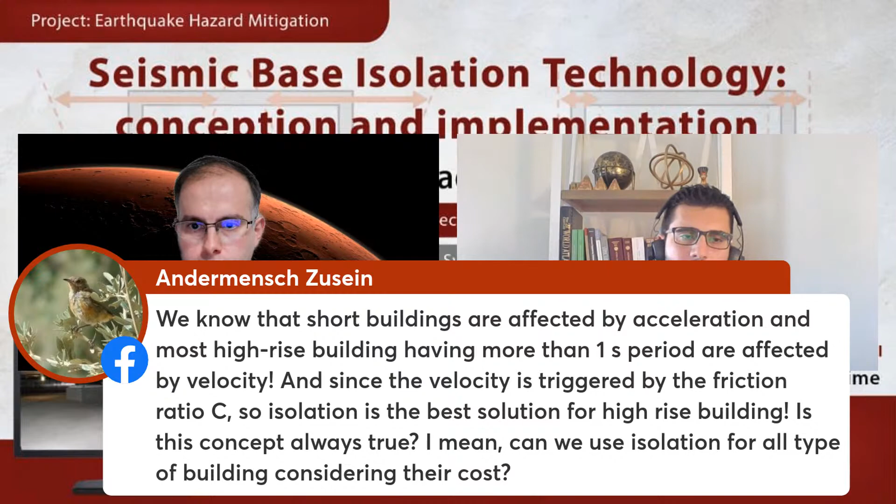Isolation is more applicable to short and rigid buildings, not tall buildings. As a building becomes taller, say with a period of 2 or 3 seconds, the concept of isolation is already achieved, because isolation moves the period from about 1 to about 3 seconds. So if the building's period is already 3 seconds, it's better to use dampers, not isolation, to control the building's movements. For tall, flexible buildings, it's better to use dampers than isolation. If the building is tall and rigid—like it has braces or shear walls and the period is still around 1 second—yes, we can use isolation.

We have used isolation for some buildings in Japan, because construction there is not like in the US—it's very heavy, with very big columns. I remember a building around 35 stories in Japan. It's very tall, so I expected the period to be long, but the construction is different. They use braces and very big shear walls, so it was very stiff, and we were able to use isolation. So if the period of the structure is around 1 second, use isolation to extend it to 3 seconds. If the period is already 3 seconds, it's better to use dampers.

Thank you very much. We'll pick another question. What are the technical criteria for resorting to the use of seismic isolation, and are there examples for existing buildings?

Thanks, I don't know if I fully understand the question. What do we mean by technical criteria? Maybe some comments about regulations or laws on the criteria for implementation of seismic isolation.

So there are lots of codes. I'll assume they're asking about technical criteria like the codes: ASCE 7-16 and ASCE 7-22. Chapter 17 talks about seismic isolation, and chapter 18 talks about damping. There's also AASHTO for bridges, which has a guide specification just for seismic isolation.